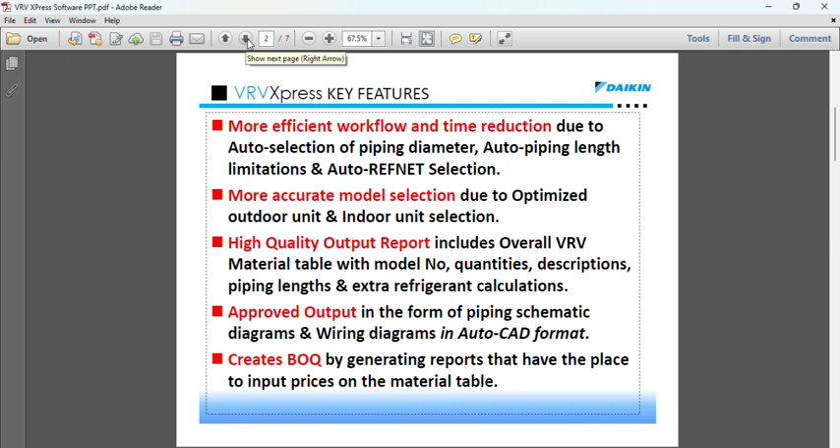To address these issues, VRV Xpress software offers a streamlined and intelligent design workflow. It guides the user step by step, ensuring that all technical criteria, especially pipe sizing, are met. The software also automatically highlights errors during the design phase, reducing the chance of mistakes being passed along to the approval stage. By using VRV Xpress software, errors in piping design are minimized, pipe sizing is aligned with system specifications, design engineer review time is significantly reduced, and overall system performance is optimized.

Now let's discuss the advantages of this VRV Xpress software. You do not need any kind of subscription or registration to download and operate this software. It comes with a built-in VRV equipment database, including all series and models for VRV X, VRV side discharge, and VRV home series. This software is very easy to download through a direct link, and auto-update option is also available from time to time. No internet connection is required to operate this software.

Now let's start the demo of this software. Once you open the software, this window pops up. At the top, we can see the toolbar.

If you wish to create a new project, you need to click this tab. If you want to open an existing and saved project, you can click the open tab. If you want to import an existing project, you can import it directly. If you want to save the project after completion of design, then you can save it. If you want to exit the project at any point of time, you can click this exit tab.

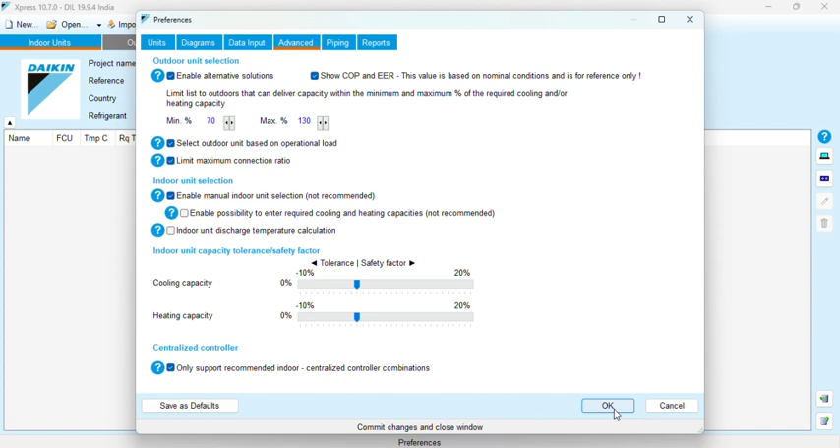Once you have selected the required or desired option, you can simply click the OK button. One more setting is required for first-time users: go to advanced and tick mark the top 5 options and this last option. You can also limit the range of capacity ratio by selecting a minimum percentage, which is 70% offered by this software, and maximum capacity ratio performance may go up to 130%. Then you can save your preferences by simply clicking the OK button.

For this example, I have prepared an equipment selection summary. I need to fill the data as per this equipment selection summary in my software. You can enter the project timeline through project details here by entering the project name. For this example, I have taken project name as XYZ, client name as any random client name, and reference through architect, consultant, or any other agency. Revision — since I am doing this project for the first time, the revision is 0.

And I'm going to untick this precision piping method because I want conventional routing in my piping diagram.

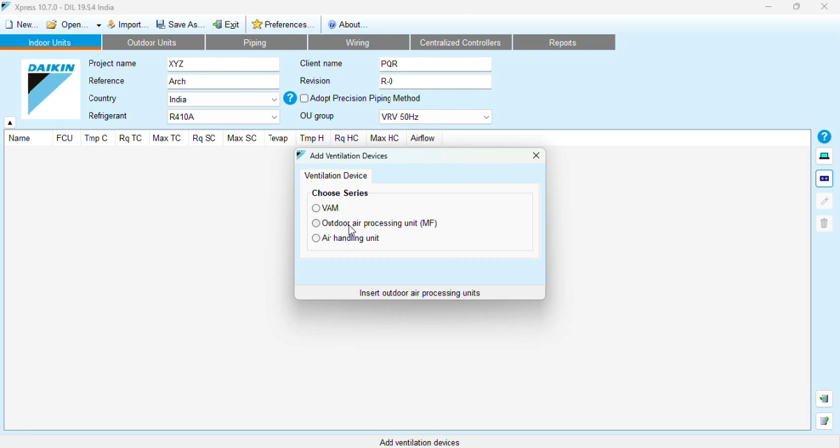After completing all these details, we can come to this tab and add the indoor units. But before that, this indoor unit tab allows you to select indoor units and other ventilation devices like VAM, TFA, and air handling units. Once we complete the selection of indoor units, we move to outdoor units. Then automatic piping and wiring diagrams will be generated based on our input. Finally, we can select centralized controllers as per requirement, and at the end, download and generate reports in Word or AutoCAD format. So let's start with indoor unit selection.

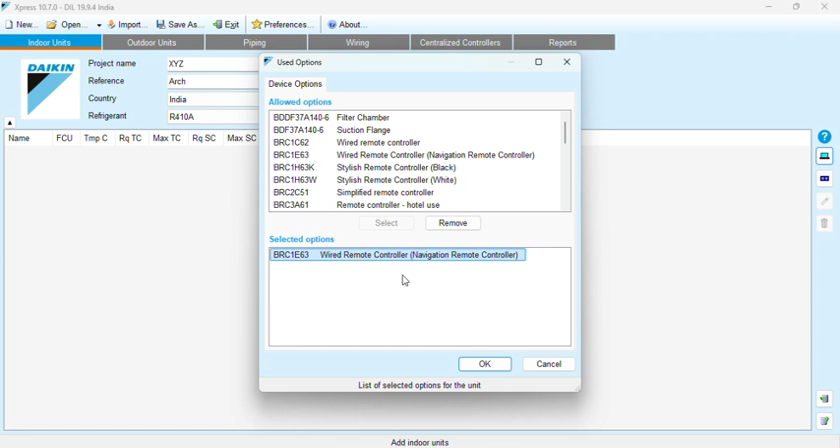You need to simply click this button, add indoor units. The name can be filled up with, for example, drawing room. This VRV Xpress software comes with a complete range of indoor units having all accessories required in a centralized air conditioning system, including wired and wireless remote controls, adapters, and filters. I am selecting wired remote for my example, saving it by clicking OK.

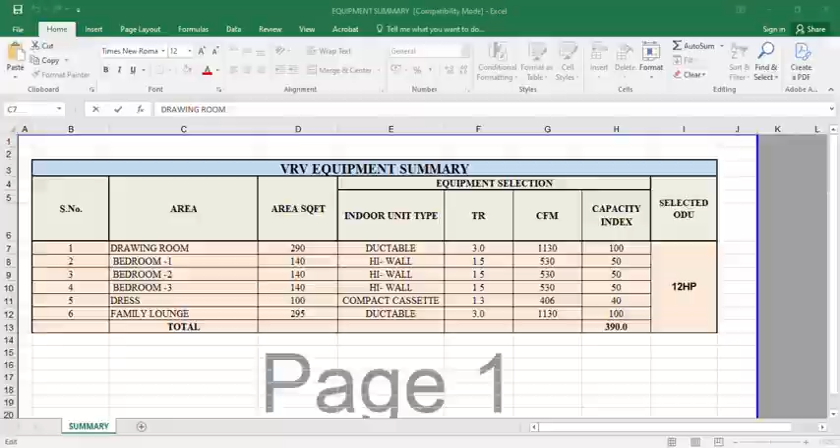For drawing room, I need to select a ductable unit of 3 TR capacity with capacity index 100. I have selected this ceiling mounted ductable unit with 100 capacity and I'm adding it. I can see this selection here. This is the unit selected for drawing room, offering maximum cooling capacity of 9.7 kilowatt, maximum sensible cooling capacity of 7.5 kilowatt, maximum heating capacity of 10.9 kilowatt, and an airflow of 1130 CFM.

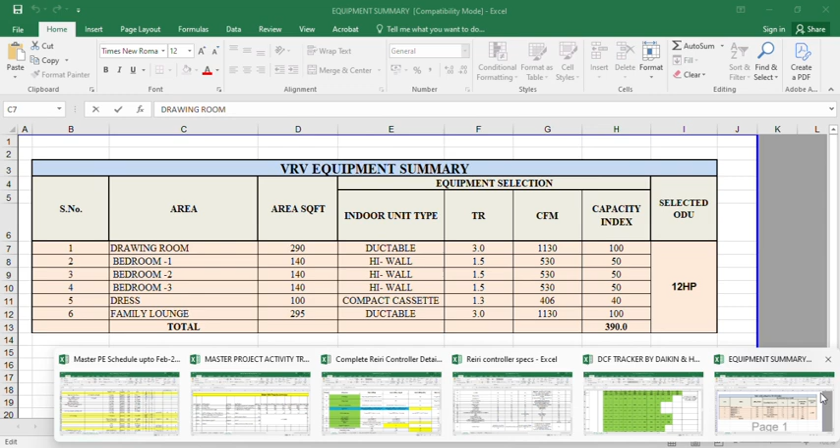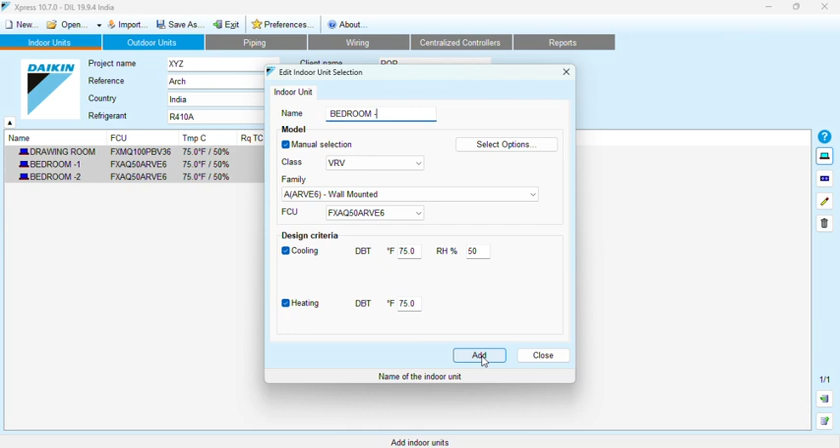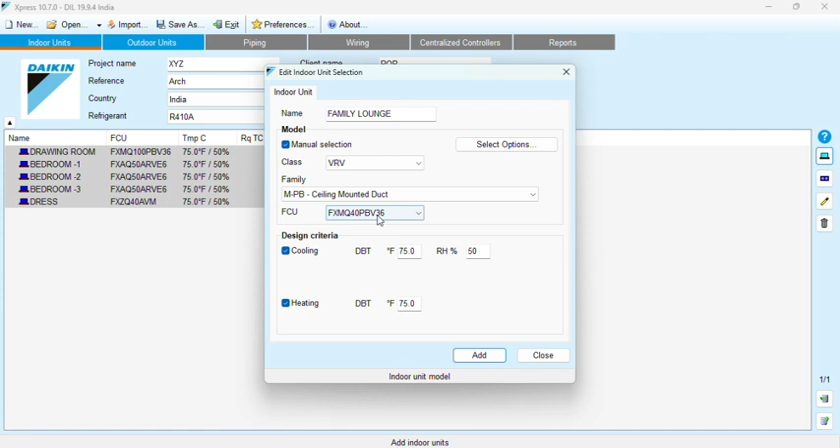Now I am going to add another unit for bedroom, a high wall type unit with 1.5 TR capacity. For bedroom 2, I again need the same unit, and for bedroom 3, the same unit as well. Then comes my dress area, where a compact cassette of 1.3 TR capacity is required. And the final selection is for the family lounge area, where I'm going to place another ductable unit of 3 TR capacity. So these are all the indoor units required for this project.

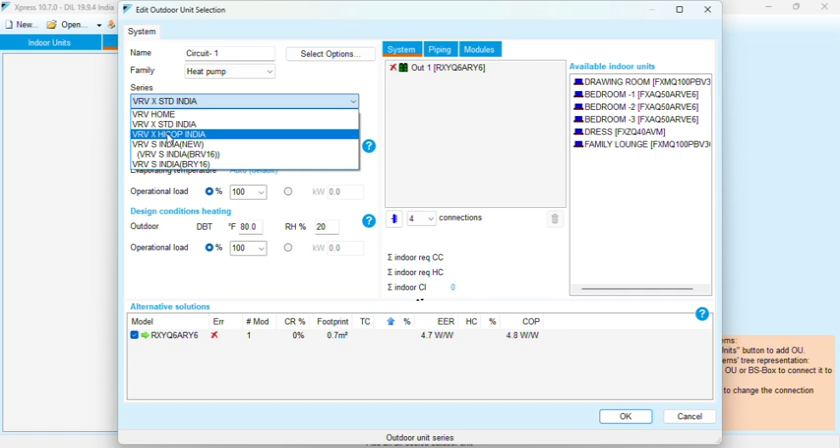Now I can move to the next tab. Once I click this outdoor unit add button, this window pops up and I can enter the circuit name. For my example, I have taken the circuit name as circuit 1. I can select heat pump or cooling only through this dropdown, and also select VRV home series, VRV X, VRV side discharge, or even VRV X high COP. For my example, I need a 12 HP unit selection. In case of VRV high COP selection, I would get a 6 plus 6 HP, two outdoor unit combination. For my example, I am taking VRV X standard.

Selecting all the indoor units, dragging them and dropping into the outdoor unit, I get these alternative solutions for the selection of outdoor unit. I wish to take the 12 HP unit, which offers 130% capacity ratio with the indoor required cooling capacity. The cooling capacity of all indoor units is 41.9 kilowatt, and against this I have selected a 12 HP unit offering cooling capacity of 34.6 kilowatt. So I have taken a diversity of 17% in this selection. Here are the values of EER and COP for all these outdoor units. Now I am going to save my selection.

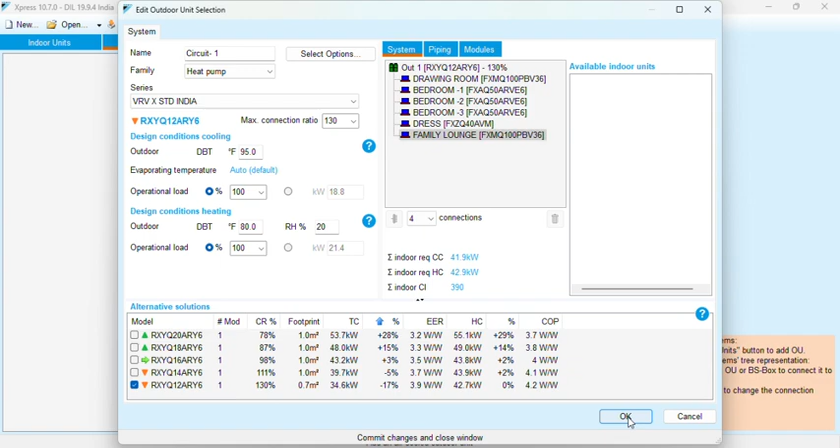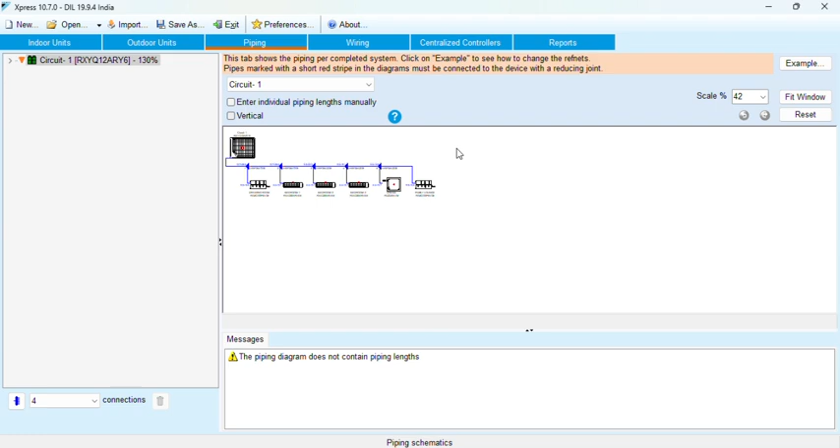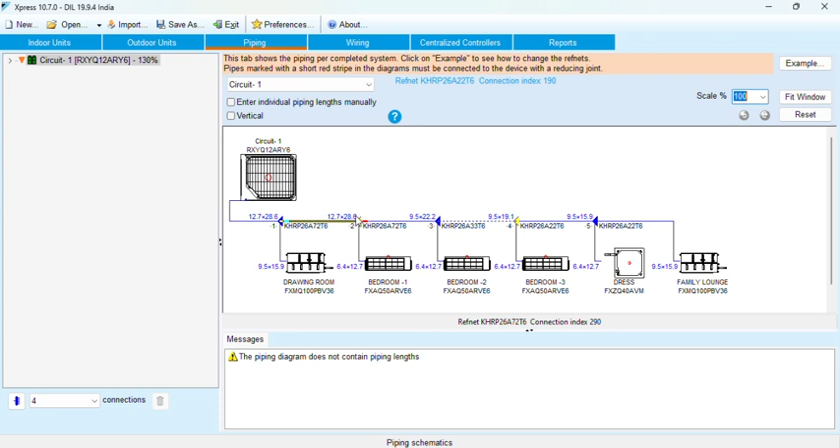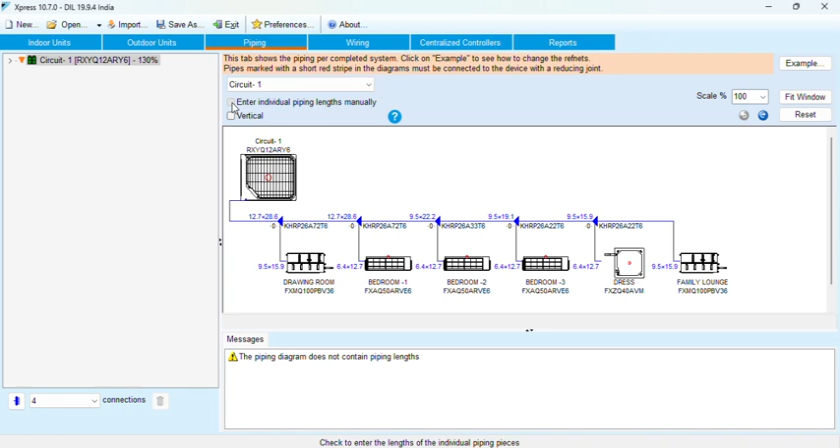Next tab is piping. Automatic piping diagram has been generated by the system. I can fit this diagram to my window. If I wish this diagram to be in horizontal position, I can untick vertical and it will switch to horizontal. If I want to scale up the diagram, I can go to the dropdown and scale it as per my requirement. I can drag this bedroom 3 unit and drop it to displace its position several times as needed, and I can undo or redo my settings. I can also enter the individual piping lengths manually.

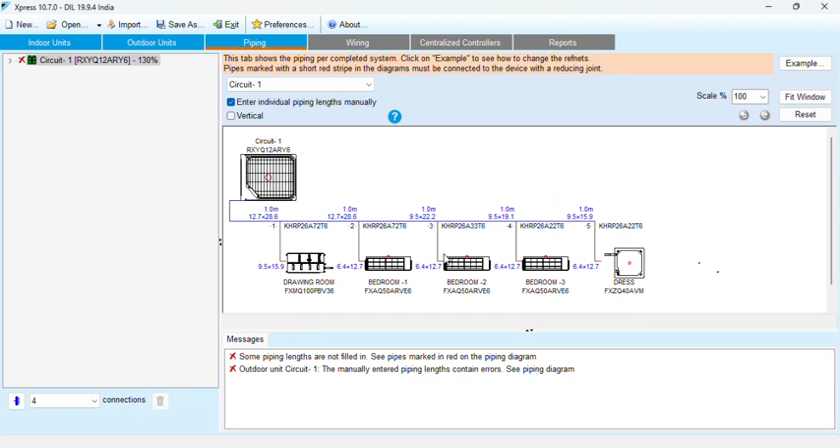We need to enter the piping length as per the actual HVAC layout which we have prepared in AutoCAD format. These piping lengths will help us calculate extra refrigerant. So we should ensure that all the piping lengths are actual.

Once I have completed entering the values, I will get the extra refrigerant charge calculation. In this example, I have got 1.1 kg as per the field piping length, and this is the standard factory refrigerant charge of 7.6 kg already received in my outdoor unit. This calculation is based on the field piping, so the software also generates the automatic refrigerant charge.

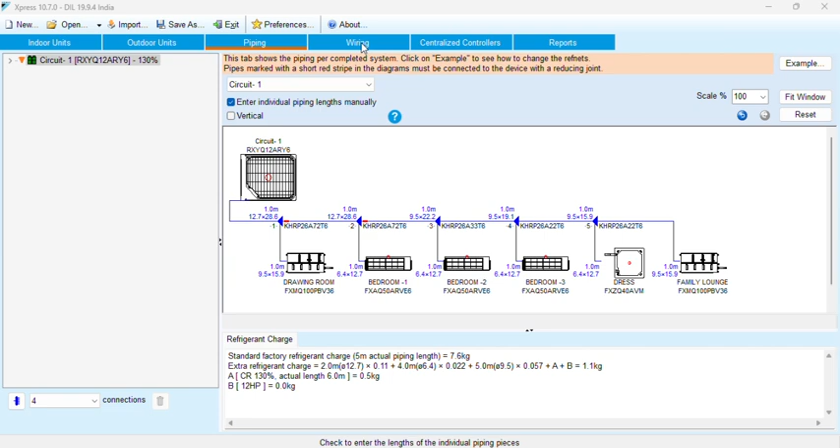Next tab is the wiring tab. Once I have completed the piping, I may enter the wiring tab. This tab will reflect this window, where we can see the outdoor unit having minimum circuit ampere of 23 ampere. MCA, minimum circuit ampere, is used to designate the cable size, and this outdoor unit is looped in daisy chain wiring with all the indoor units.

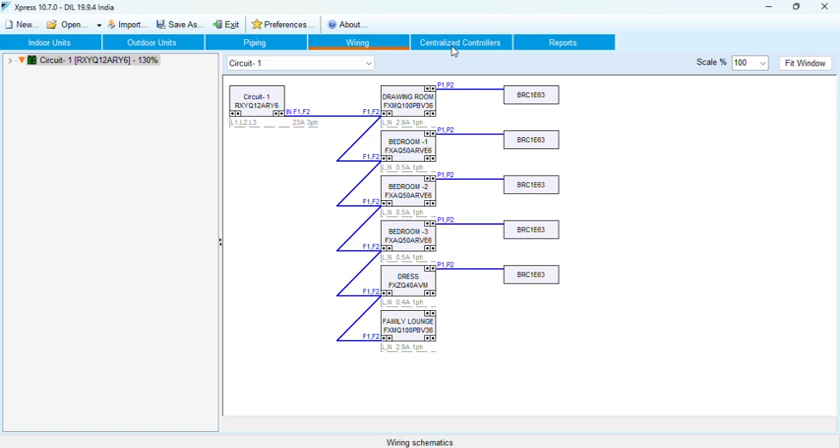All the indoor units are further connected to their individual remotes, as we have already entered this model number in accessories. Then we may move to the centralized controller selection. For this example, I am selecting a home automation DTA adapter card. I need to simply drag and drop it here, and I am connecting this card with circuit 1.

This is the final window which will be used to download and create the report in either Word format or AutoCAD format. I still need to add some project details like project address - I am taking a random address - and client address. Now I can generate the report.

The system will ask you to save the report in your desired folder, and again ask you to name the report. Once the report is saved, you can see the output in this form. All the project details are over here, which we have already fed into the system.

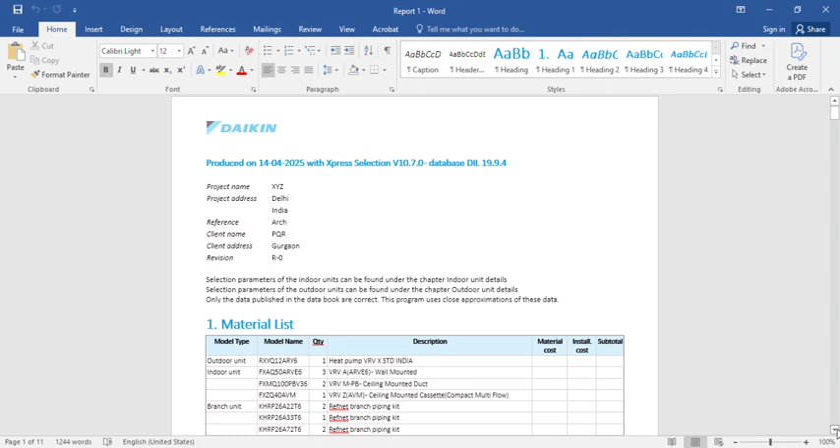This material list table contains model number, model name, model type, quantities, and a complete description. This is the outdoor unit. These are the indoor units which we have selected. These are the RefNet models. This is the centralized controller selected for this project, and this is the ceiling grid panel selected for this ceiling mounted compact cassette.

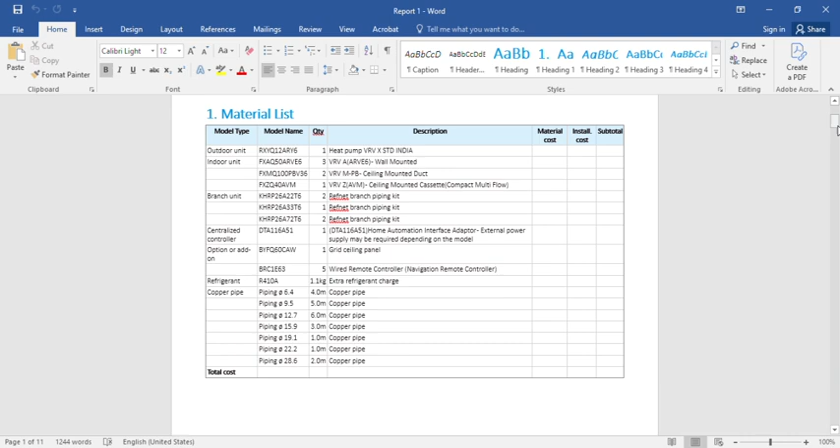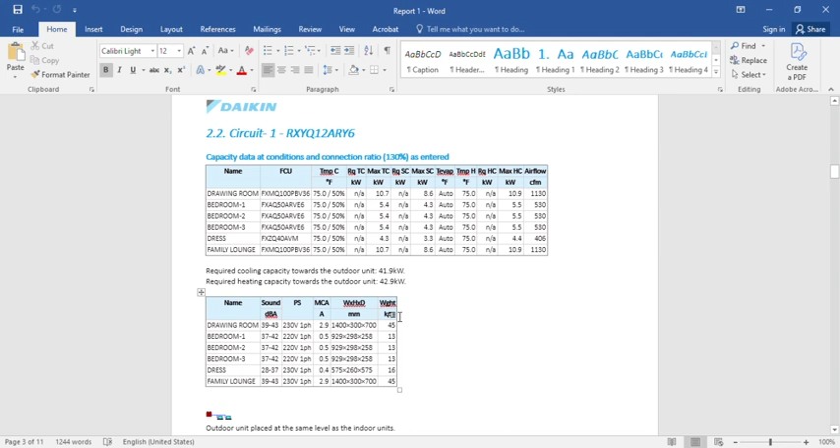This is the equipment summary generated by the system, and all the technical data sheets are here for the selected equipment. Even the sound level, dimensions, weight, airflow, etc. can be seen in this report.

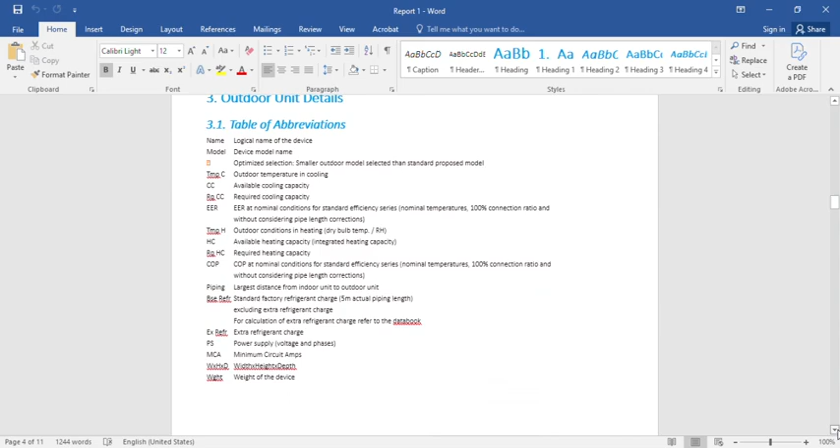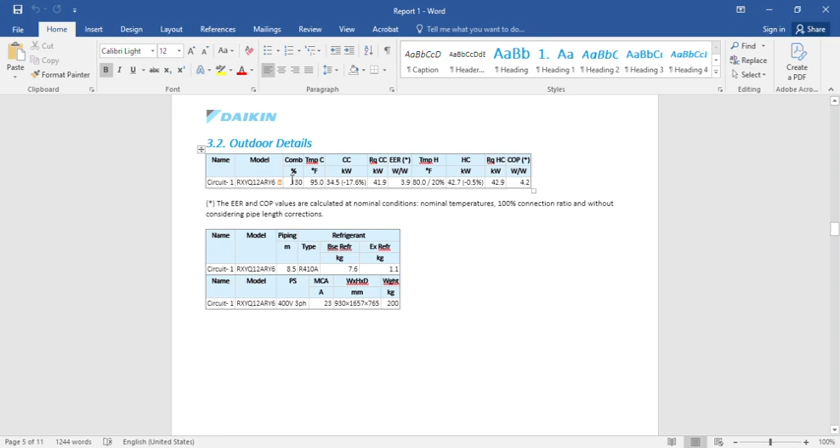These are the outdoor unit details and abbreviations. We can also see the technical data for the outdoor unit as well - this is the capacity ratio, this is the cooling capacity offered by this outdoor unit, etc. All the technical details are available.

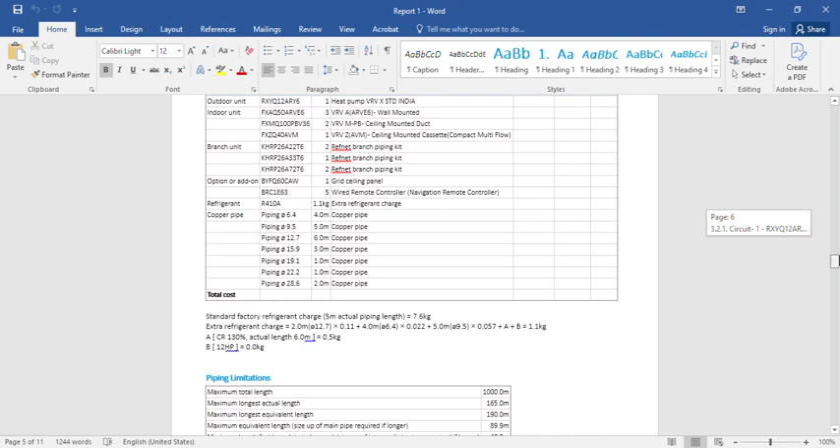This is again the same table. The only difference is that field piping extra gas calculation has been represented over here, and piping limitations are also represented for reference purposes.

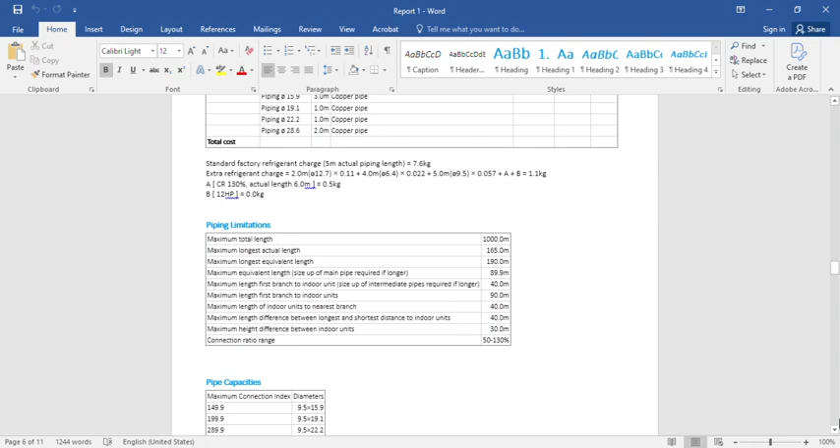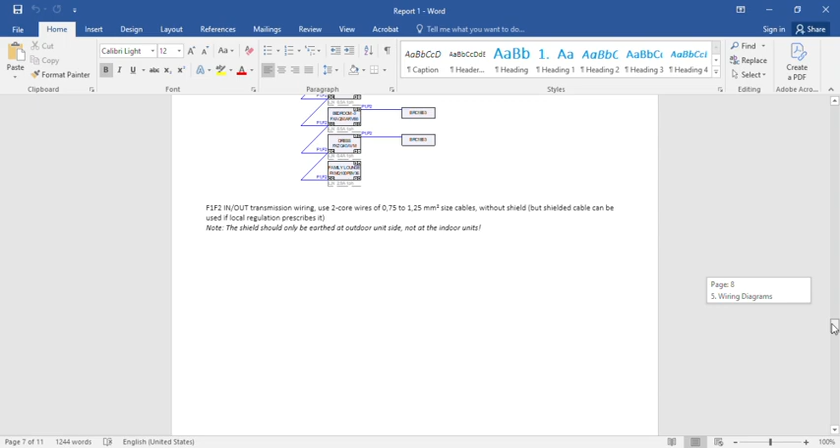And this is the major output of the piping circuit diagram. Then the piping wiring diagram, then centralized controller diagram, and so on. So we can get all these details in the form of a report.

If we wish to download the report in AutoCAD format, then we need to click this option. The system will again ask to save the report. You may go to the desired folder to download the reports, and finally the reports can be seen.